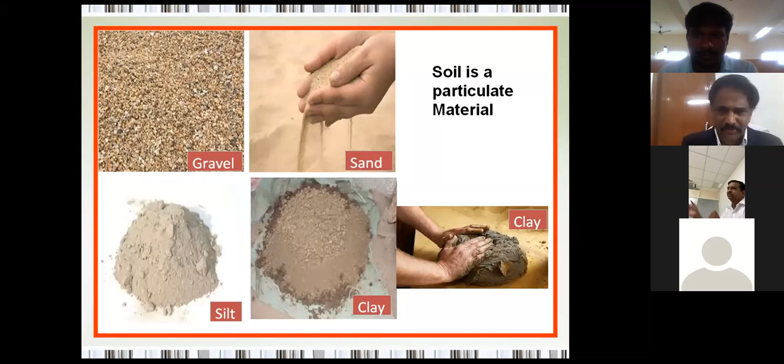I would like to start my presentation by saying that soil is a particulate material. Suppose you take steel, for example - steel has a lot of intermolecular attraction, the molecules are so strongly bonded that it behaves as a single body. When you apply load, all the molecules and particles making iron as a body will act together. But if you consider soil, it is completely a particulate system.

Suppose you consider the example of gravel - you can see that gravel looks like individual soil particles. If you take the case of sand, for example, you can take it into your palm and drop it as individual particles, and you can see that sand is also a particulate system.

If you take clay, for example, the silt - we know that soils are classified into two major categories: one is coarse grained material, the other is fine grained material. Once you are able to classify the soil into coarse grained or fine grained material, 50% of your problem is solved, in the sense that coarse grained materials have different techniques for providing foundation solutions, while clay soils or fine grained materials have an altogether different set of methodologies. So in the hierarchy, the first thing is gravel, next down in size is sand, and after sand size comes silt.

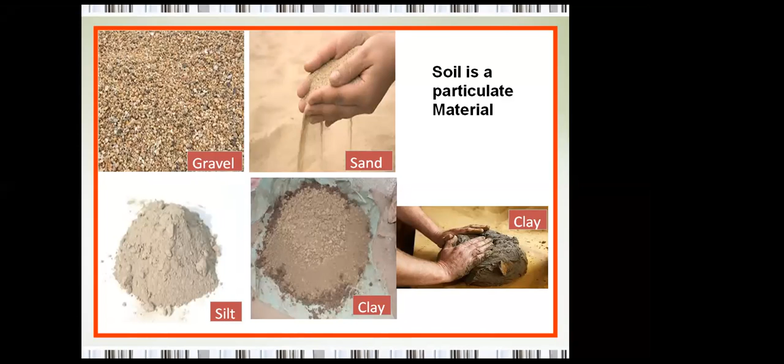I have put some kind of model here. Suppose you take a container and imagine spherical balls kept one over the other, with one particle over the other, kept there and closed with a lid. Suppose if I keep this weight on that, then the original position goes down below, and this particle will go and occupy the valley that is there, and this top particle will also move because of the load applied, the gravitational effect, and point-to-point interaction effects. These particles will compress, and you can see some compression taking place, and voids also getting reduced here. This again indicates that these materials are particulate in nature.

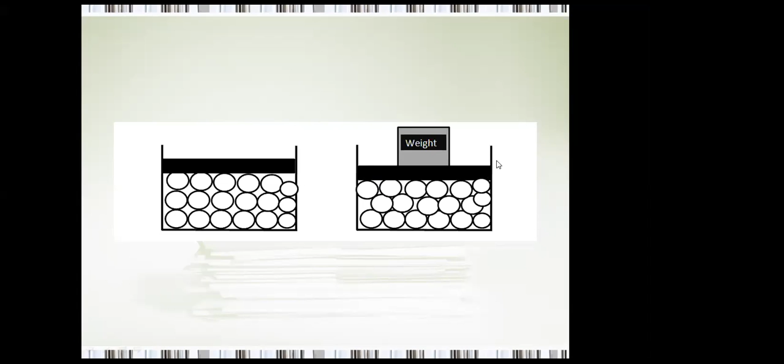And if confinement is not there, for example if the wall is not there, all particles will roll down under the influence of gravity. This small experiment demonstrates that it is a particulate system, particularly gravel and sand, which are all governed by gravitational forces. If confinement is not there, these particles will have a tendency to roll over one another, and complete flow will take place. If the weight is looked upon as a structure, it will settle if there is no proper confinement. So even if sand is there, we have to keep it at a depth sufficient that the overburden pressure takes care of lateral confinement of the soil.

So before introducing soil, I wanted to tell you that it is a particulate system, and therefore a lot of complexity is associated, compounded by particle sizes, particle shapes, and other geometrical features, along with engineering and architecture considerations. Therefore, we have to very carefully understand soil. Once you understand it, it has got a language to speak, and if you understand the language with which soil speaks to you, you will be able to easily provide solutions whenever you encounter it. As said by Atkinson, one of the major former professors of Cambridge University, all structures, except those which actually float, are founded in soil. Therefore, whatever infrastructure projects you are seeing, they're all founded in soil. Once you are doing foundation work, you have to understand the soil and how it is going to behave under the influence of loads.

Soil can be tested in the laboratory, and it has got a language to speak. If you can understand that language, you will be able to provide solutions with the language that soil is speaking to you.

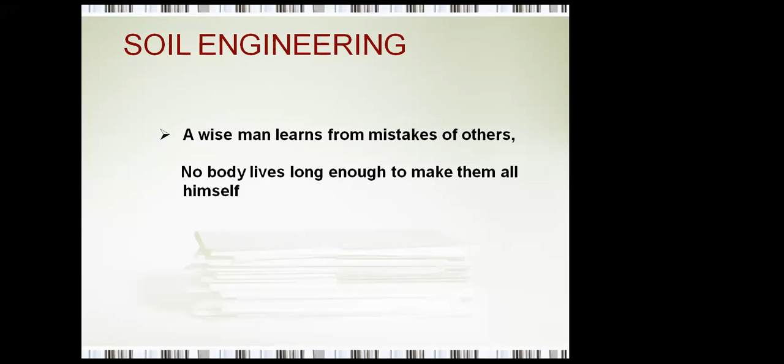I would like to introduce to you this famous man, Karl Terzaghi, who is recognized as the father of soil mechanics. He lived from 1883 to 1963. When he published a book in 1925, that became the starting point of soil mechanics, and that's why he is called the father of soil mechanics.

He made principal contributions in the field of soil mechanics during those days. He used to go by boat and by ship from place to place wherever there were problems related to soil, and then he devised means to provide technical solutions with proper scientific backup. He postulated many theories which are the basis even today for us. As you get along with your subjects, you will understand that the basic work was done by Karl Terzaghi in formulating a lot of theories based on which we can take many decisions. This entire subject of soil mechanics began to be understood from the year 1925, when Karl Terzaghi made his first publication in the German language.

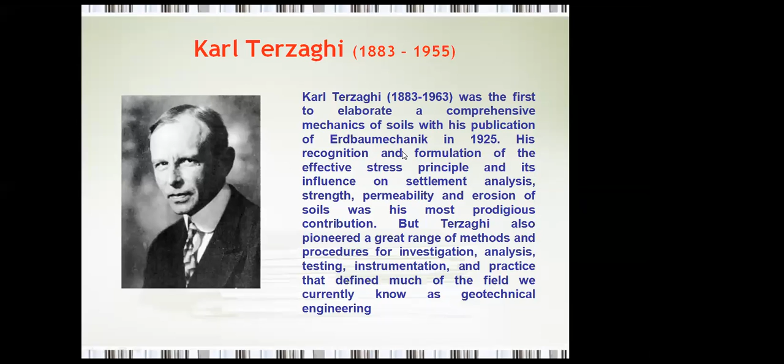He has said some sayings, because I keep quoting what Karl Terzaghi said at many places. At Harvard, he said one thing in simple words: if you want to know what type of soil it is and how it is going to behave, you take the soil to your hand and feel it. Once you have that feel, you will be able to comment on what type of soil it is. Don't just look at the soil and say this soil is so and so and the other is so and so. You take the soil to your hands.

If you feel grit, then it is silt. If it is smooth, it is clay. While interacting with water, if it sticks to you, it is plastic clay. Once you feel the gritness and size, you will be able to understand what material you are encountering in practice. That is what is very important.

He also drew an example. If you want to understand whether a given chair is comfortable or not, can you just see the chair and say it is comfortable? No. You have to be seated in the chair to try to see whether it is comfortable or not. Therefore, whenever you go to the field, feel the soil. Take the soil to the palm of your hand, and then try to understand what type of material it is. That's what he said.

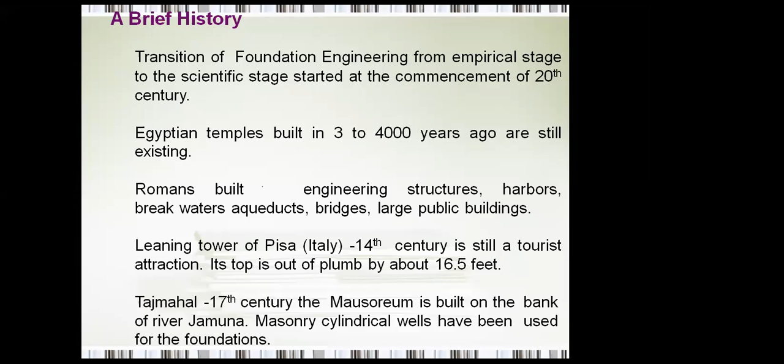You can also see a lot of presentations by John B. Burland, a great man in soil mechanics, more than 80 years old, still contributing quite a bit. This is the Leaning Tower of Pisa - you can see it was at 5.5 degrees. Earlier it was tilting, now it has come back to 3.99 degrees from the plumb.

Some of you can make a presentation on this masterpiece as an example of the compressibility of soil. The structure has not failed, but the foundation started tilting, because the soil below, which is compressible, started sinking.

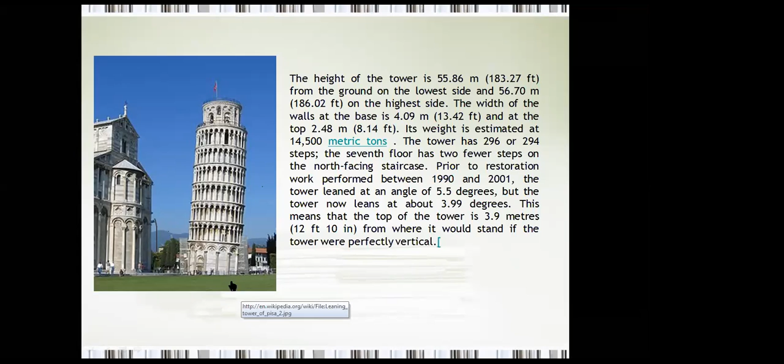I would like to give you the example of Taj Mahal. Bush, Obama, Clinton have come and visited Taj Mahal. Almost all American presidents and international tourists come and see the beauty and symmetry of the complete Taj Mahal, but nobody thinks about what type of foundation made that glorious structure possible, which has not experienced any cracks, though it was founded in the clay on the banks of the Jamuna River, in the deposit of silt, by well foundations during that time.

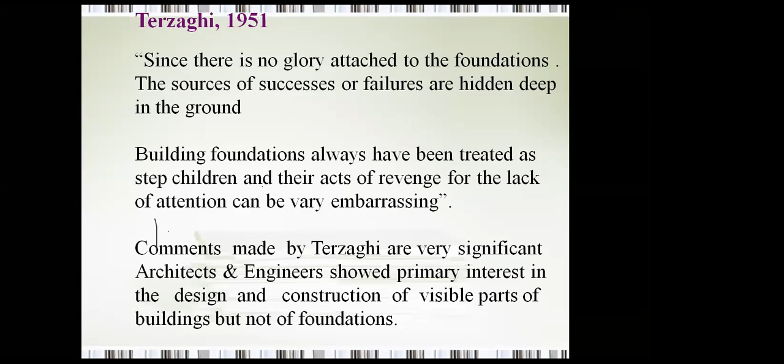Karl Terzaghi says that when you attach more importance to external beauty and don't attach importance to what is happening below the eye, that is in the foundation, the consequences will be very catastrophic. Therefore we have to pay a lot of attention to soils and the foundation approach, the methodologies that we adopt in case of soils.

I would like to present some of the case studies that I have done in the recent past in the region of Rayalaseema, just to impress upon you the importance of soil mechanics and the need for proper investigation of soil before taking engineering decisions. I would like to present some examples at a glance, and then move forward.

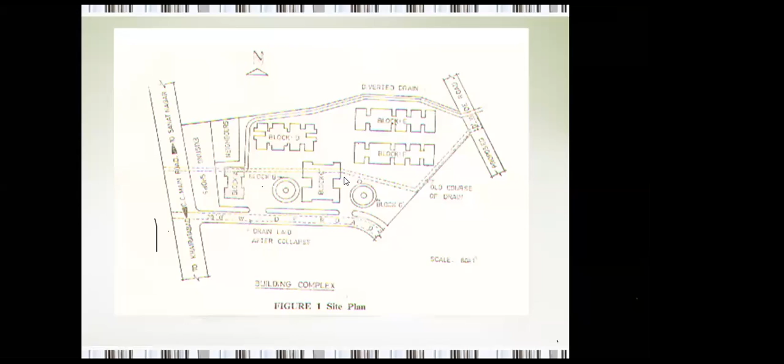The entire soil investigation was taken up, and you can see this was the building that was there before the collapse. The whole building collapsed because that drain, over which the piles were driven, again went with full charge of water. It undermined all the surrounding soil of the pile.

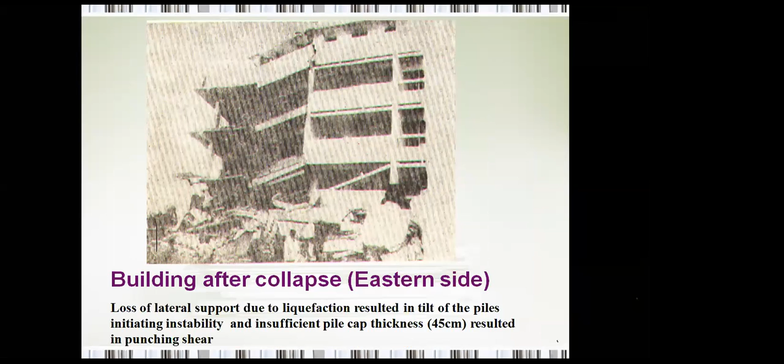The pile lost its lateral support and completely experienced buckling, and then the whole building collapsed. Later on, they made a provision that any building of G+3 nature has to get a thorough soil investigation done, and from then onwards, complete regulations have come across Andhra Pradesh.

Therefore, many structures that are constructed come to educational institutions for consultation or testing work, and other suitable agencies they approach to get the soil tested. Once you test the soil properly, and then design the foundation appropriate to the soil properties found at a given location, there will not be any issues.

But as Terzaghi said, if you don't regard the soil, the consequences of devastation will be very, very catastrophic. That's what Terzaghi said in the 1951 Rankine lecture. We have to be very careful about the soil investigation and the nature of the soil.

Depending upon the type of soil, we have to approach various methods. If competent soil is available at shallow depths, we go for shallow foundations. If competent soil is not available at shallow depths, we have to take the foundation loads to deeper strata by piles. Take for example Chennai, Kolkata, Vizag, Mumbai — all these cities, all their infrastructure projects.

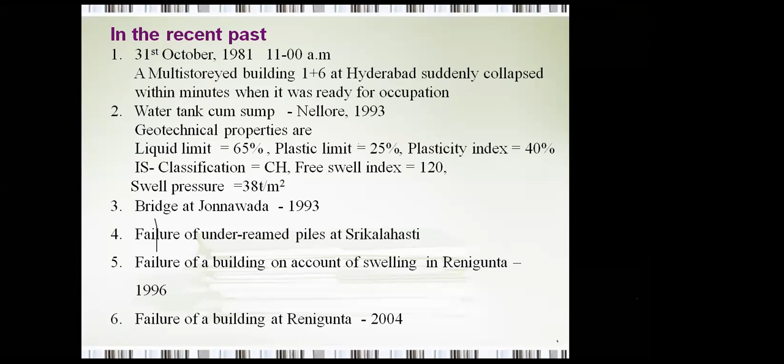And if there is any problem, we can always do some kind of treatment, either by modifying the ground through compaction or dynamic loading, or by using chemicals, or by transferring the loads to deeper strata. Lot of options are available, but the first and foremost thing is you should be able to characterize the ground.

These are some of the things I wanted to say. I will tell you in the next class how actually some of the technical solutions could be provided. And just to conclude, I would like to say that...

We have to describe the soil properties, then use Terzaghi's principles or any other sound mathematical tools to understand the bearing capacity properties and settlement calculations, and then understand the stress-strain behavior — the language soils will speak. The language with which soils speak is, one of the languages, the stress-strain diagram.

If you get a very straight, stiff diagram, the soil is very strong. If you get a slanting stress-strain curve, that means it is a weak soil. That is the language with which soil speaks, and we can understand the soil behavior and take decisions appropriately.

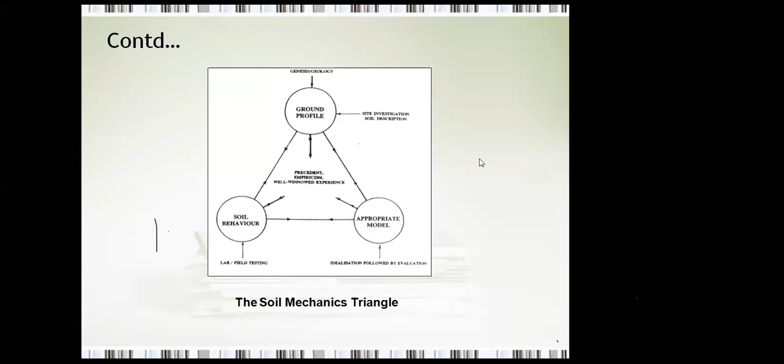Okay, any questions? If you are having any questions, you can ask sir. Anyone having any questions, you can just unmute yourself and ask. Some of the students ask very good questions. I'm very happy that the students are so interactive, and that is a wonderful thing for a teacher.

Even a student asking questions would be a fantastic interaction, happy time with students. Some of them raised very pertinent questions, and if you have more questions you can ask me. In the present semester geotechnical engineering is going on, so students are thorough with the subject. Oh, the subject is going on now. Yes sir, for third year Geotechnical One it is going on. Theoretically they are getting the subject now, and practically you are showing all the things, so the bridge between practical and theory is filled here.